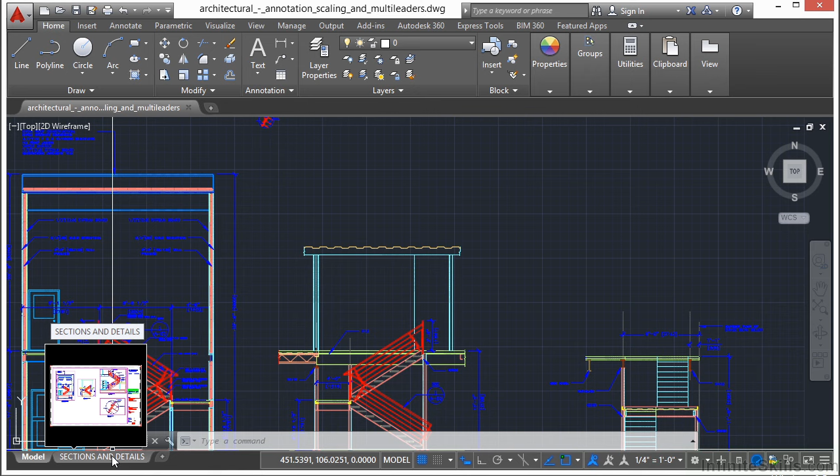So to start, we're going to make a new layout tab. To do that, just right-click on the layout tabs and click New Layout. That will create a tab called Layout 1. Page name is fine for right now. So let's activate that tab by clicking on it. Just go to it. And we have a viewport already set up.

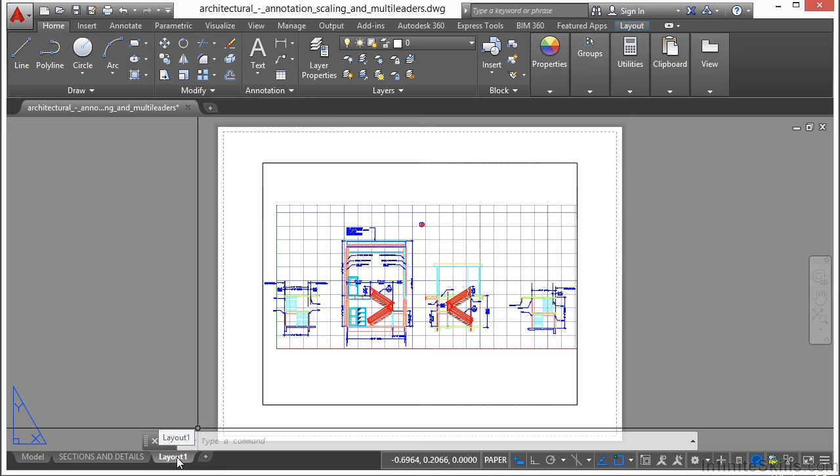Now let's go to the Page Setup Manager. It's real easy to get to. Just go down to your Layout tab and right-click on it and go to Page Setup Manager. Now this window allows you to either pick a page setup already in the drawing or make a new one. Any names that you see down here with asterisks on it, as we have here layout and sections and details, are paperspace tabs. Any others that you'll see can actually be assigned to it.

Right now we don't have any page setups in here. So in order to use our page setups, we're going to have to create a new one. So click on the New button. Let's give this a name. I'm just going to call it Page Setup Example.

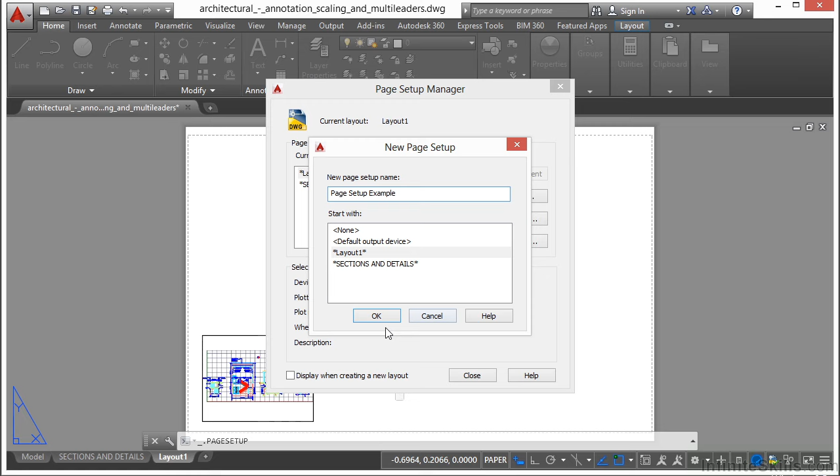Now what you want to do with the names is give it a name that defines or describes what's going on. So if you're printing a black and white 8.5 by 11, give it a name similar to that. Keep them short, but make sure they're clear and well defined so that anyone using them knows and understands exactly what it is you're trying to do with that page setup. So give it a name, click OK.

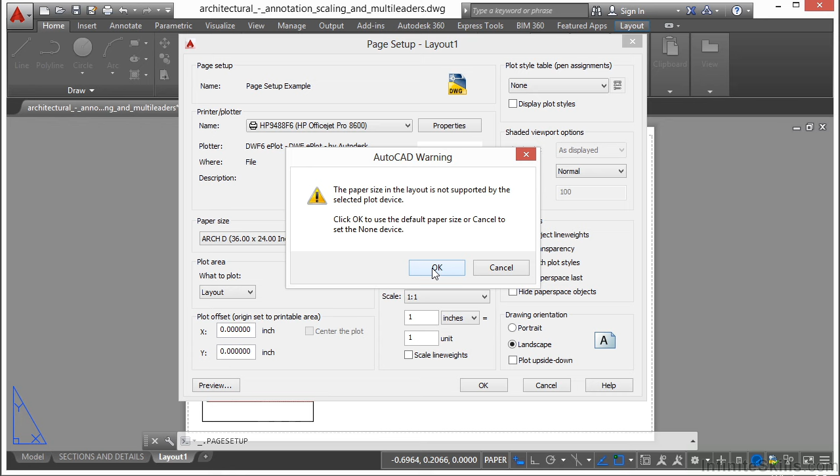Now we just go through all of the settings, just like we would when we were normally printing. So I'm going to pick my printer first. Since I only have one real printer to choose from, I'm going to pick it. And this gives me a warning. It says, hey, my page size is too big, and I realize that. I'm clicking OK, and it gives a description of what's going on here. Now I'm going to pick letter size for my paper size, and I want to pick extents. I want it to center the plot, and I want it to fit to the page.

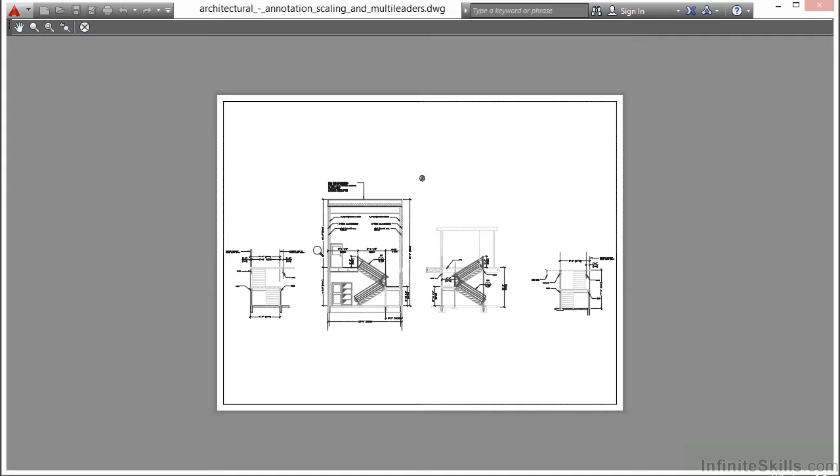When you're ready, click on this preview, and the preview button will show you exactly what it's going to look like. See, that fits everything into an 8.5 by 11 size sheet. Works perfectly for me. Now I can zoom in and out with my scroll wheel. I can also pan with my scroll wheel. Or if I right click, I can get to pan and zoom, or zoom window, or zoom original. Or when I'm finished, I just click exit.

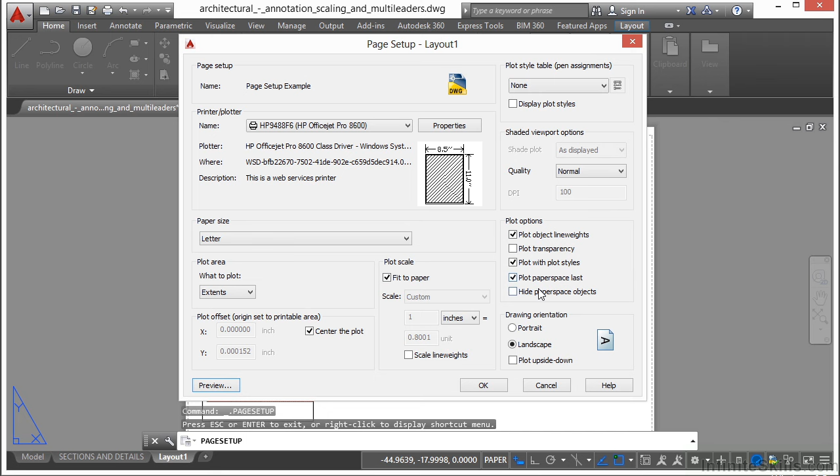Now when everything else is okay, make sure my portrait and landscape is set up. I'm not going to use a CTB file. Everything else here looks good. I'm going to click OK. And now my page setup has been created, and now I can apply it to this paperspace tab. So what I do is I select it, and I hit the Set Current button. Now when you do that, you'll see here it says Layout 1, and in parentheses it has the name of the page setup. That means it's been assigned to this paperspace tab.

This paperspace tab does not have a page setup at all. That's okay. I'm going to create one more. So I'm going to select New. Now you notice that I selected this page setup before I clicked New. This works just like it does in any of the other style creations, dimensions, text, etc. It will copy these settings, and then I'll just be able to tweak it however I want.

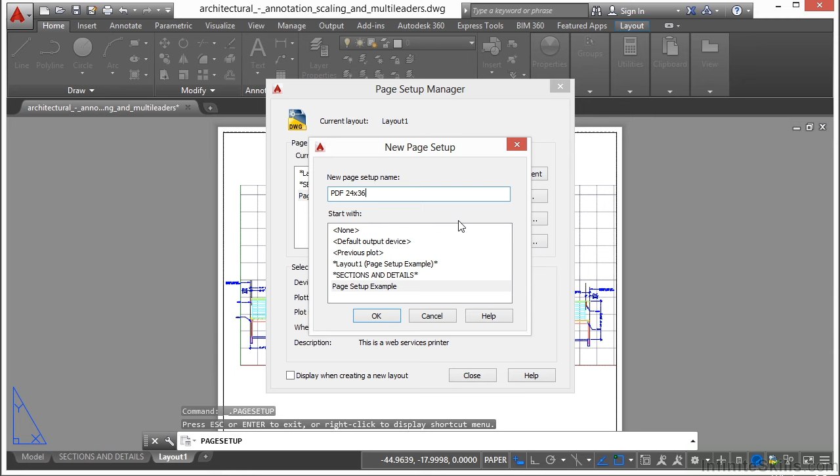Well, I'm going to call this PDF 24 by 36 because that's what I'm going to create. With this page setup, my drawings will be printed not to paper, but to a PDF file, and it will be full size 24 by 36. So I'm going to click OK.

AutoCAD by default and out of the box comes with several settings. I have some programs that I use like Snagit, OneNote, and Nitro PDF Creator that will allow me to print to those file types. Also, you have a Microsoft XPS document writer. You should have that if you're running Windows, which you should be. If you have a fax printer set up or your default Windows printer, you can print to those types of

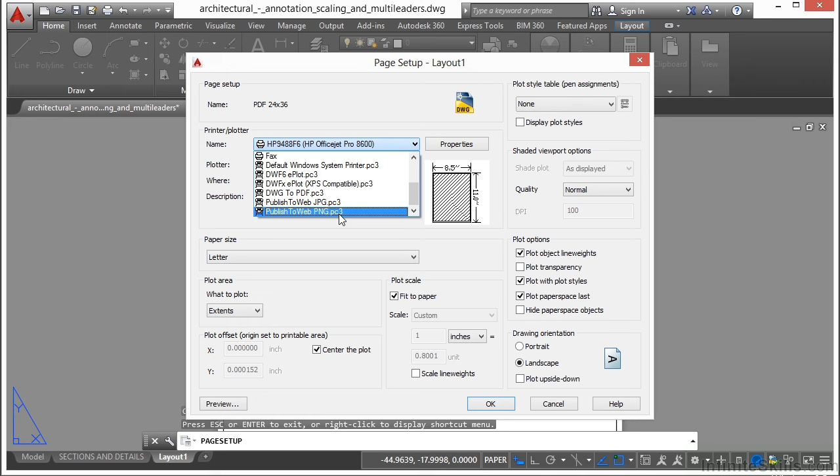files. AutoCAD itself comes with settings to print to a DWF file, a DWFX, a PDF, a JPEG, or a PNG file. And those are these options here. So instead of sending the document to a piece of paper, it sends it to one of these electronic file types. So this is a great way to share your drawings via email. Well, I'm going to use the DWG to PDF file.

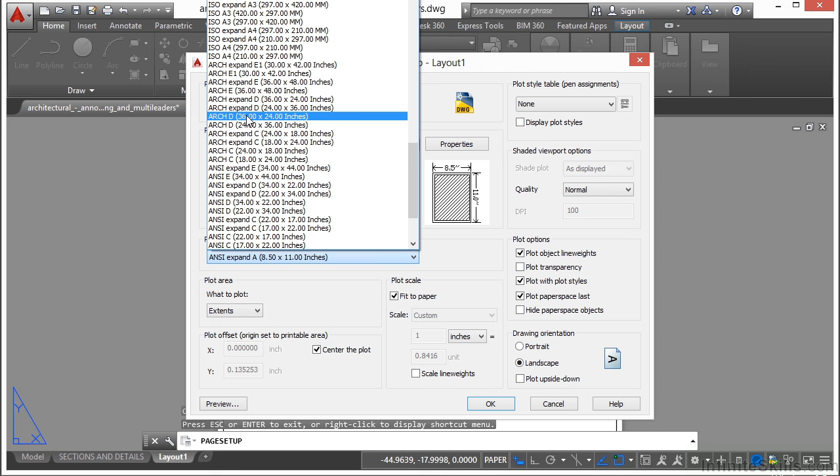I have a lot of options here available to me. Now, this is an architectural D size drawing, a 36 by 24 size sheet. Now, you see I have two options here, 36 by 24 and then 24 by 36. Well, this drawing is a 36 by 24 in reality. It's 36 wide, 24 tall. And the first number in your AutoCAD printing is what's going to be the width. So that's what I'm going to pick, 36 by 24.

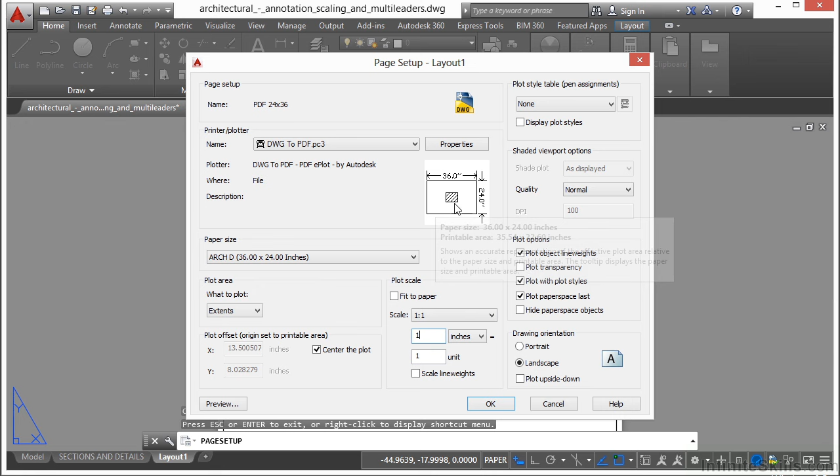Now I'm still set as the drawing to extents, and this is set to center. This is set to fit to paper. I'm going to turn that off, change my units to 1. And you can see here, this drawing is not really set up to be printed to that size. And you're going to find out that this happens to you quite often, where you think it's set up to be a certain way, but it really isn't. If I hit preview, you can see how small that is.

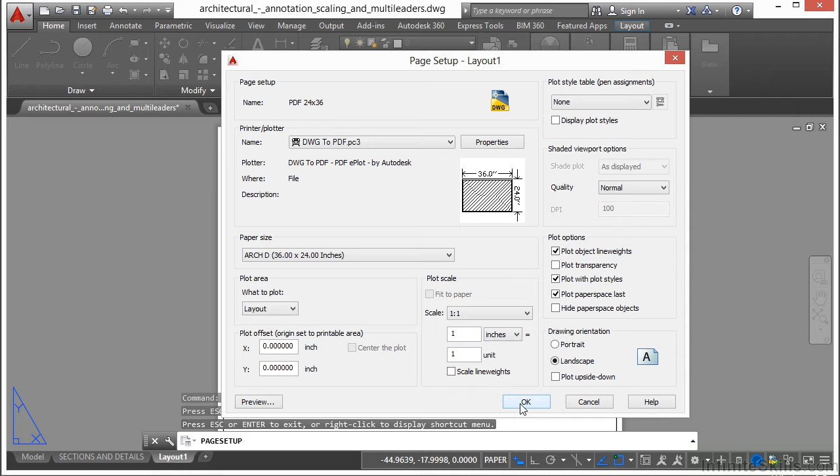What's happening here is that this paper space tab is set up to be 8.5 by 11. And that's okay, because I'm not going to apply it to this paper space tab. I'm going to apply it to this other one. So I am going to set up to layout 1:1. Now it's going to be 24 by 36 when I use this setting. I'm going to click OK. And now it's here as an option available to me. I'm going to click close.

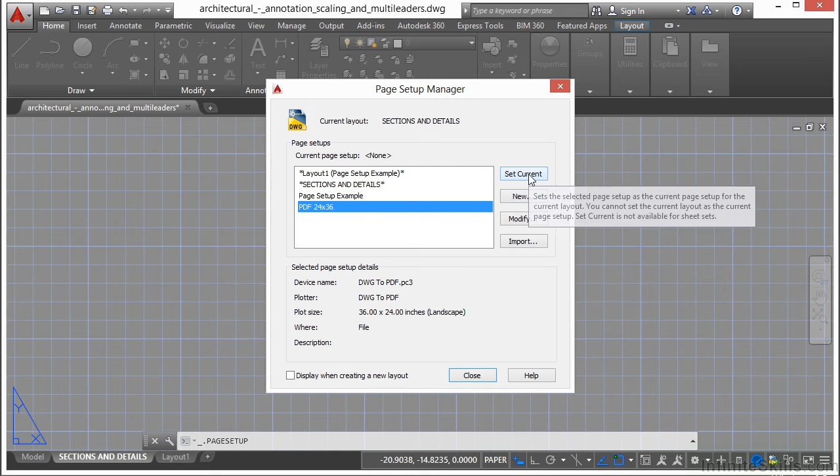I'm going to go to this paper space tab. I'm going to right click on it and go to my page setup manager. And for this paper space tab, I'm going to select my PDF 24 by 36, pick set current, and click close. Remember I talked about that dashed line? Here it is right there. That's the dashed line. So I'm going to have to reposition my viewport and my other drawing objects here to make sure it fits inside my sheet.

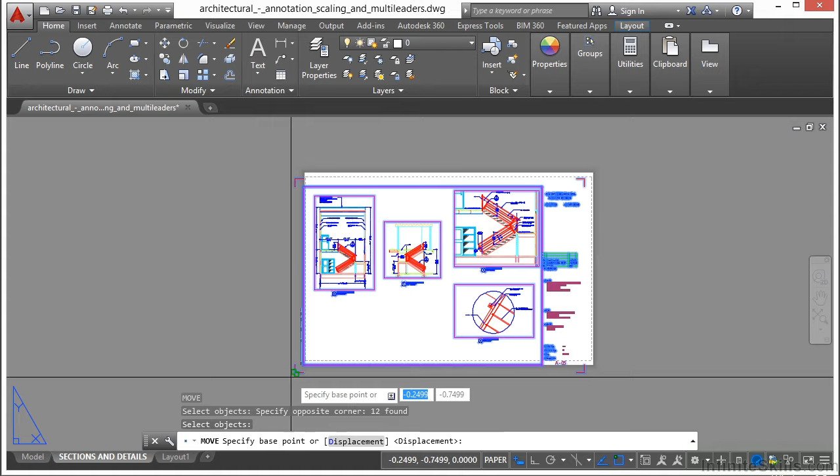So I'm using the move command, selecting everything. Now they have these little guidelines here in this drawing, so I'm going to try to use that. You can see the white paper is right here. That also gives me a guide as to my paper size. Now you can't snap to any of those points, so you just got to kind of eyeball it. And once you do that, let's look over here, and we see that it seems to be fitting into everything, and we're good. Now we can save the file, and we can go on from there.

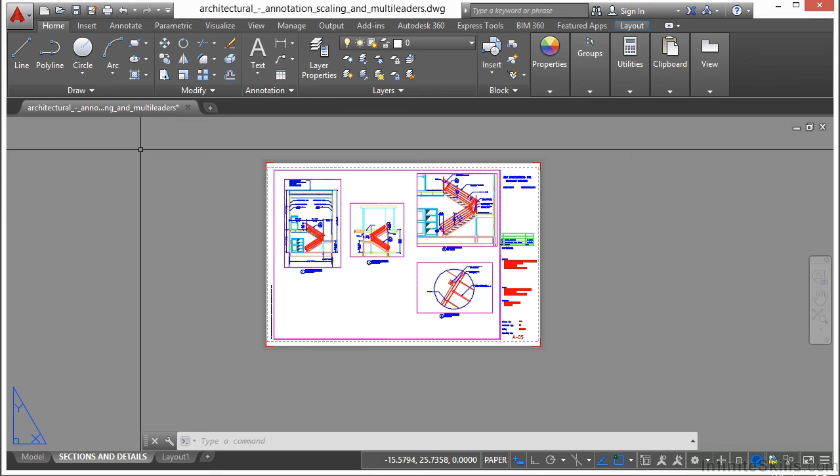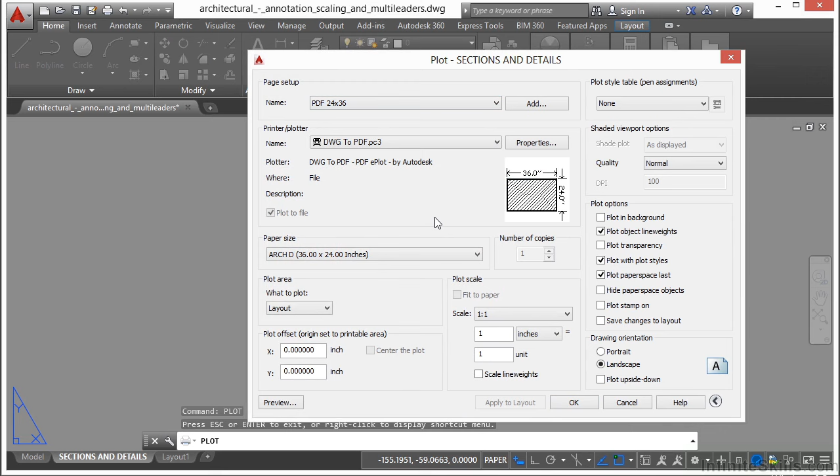Because now when I want to print, just go to print, I find my page setups, I select it, I hit my preview, see that it works, right click, exit, and then click OK. I don't have to go through any of these settings. They all come up automatically for me, and I know they're correct. So it saves time and it makes sure you print correctly every time.